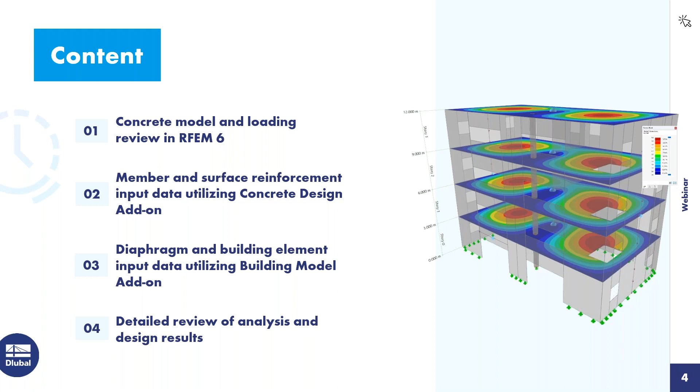Regarding the content over the next hour today, we will be working with the structure you see on the right-hand side. We'll begin in our main program, RFEM 6, where we will review the model as well as the loading. Then we'll move on to utilize the concrete design add-on for our member and surface reinforcement input data. We'll also be taking advantage of the new add-on within RFEM 6 called the building model, which allows us to define building-specific elements such as diaphragms, spandrels, and shear walls. Finally, throughout the presentation, we will be running both the analysis and design and taking a look at the results in more detail. So we'll immediately begin within our main program, RFEM 6 here.

As you can see, I've taken the liberty to already model our concrete structure. But if we visit our base data by right-clicking on the model name, when you begin a new file, you will give it a model name. The type of model will be in a 3D environment, for example, today. Under the second tab are our various add-ons. RFEM is responsible for the full analysis of our structure, but if we wanted to take this a step further, and in particular today, to carry out the concrete design according to the CSA standard, then we would need to activate that concrete design add-on.

Under this third tab, you can see that we will generate the load combinations automatically according to the NBC that is selected here from our dropdown, but many other international standards are also available. We also will be utilizing the 2020 standard. As far as the concrete design, we will be carrying out the design according to the CSA A23.3, the 2019, but if you do have access to the concrete design add-on, you will also be able to run your design according to the ACI, the Eurocode, or other international standards offered.

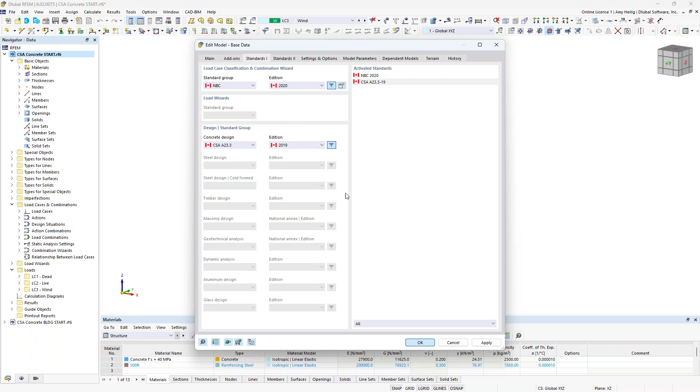Once this information is input, we can go ahead and jump back into the main program RFEM to review the model input data, and we'll begin with our materials. On the left-hand side, you can see that the concrete compressive strength I'll be utilizing for all of our elements today will be 40 MPa. If I double click on this material, I wanted to point out that the material type is set to concrete. When we do this, we have an additional tab to specify the creep and shrinkage properties of the material as well, which will come into play later with the long-term deflection. For our example today, I'm going to leave these options turned off, but keep this in mind for those specific concrete materials. I also have here defined the reinforcing steel material, 500R, which will come into play later with our reinforcement input data for our elements.

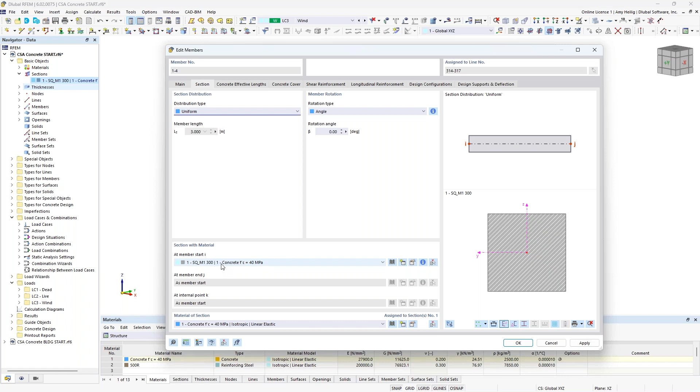In addition to the materials, we also have our cross sections. I actually only have one cross section defined for our members, which are the columns running up through the center of our structure. Double clicking on these particular members, you can see that the member type is set to beam, so this would be any standard beam or column element. What also may be common with concrete design is the member type rib, so we can place a beam element below the depth of the slab here, integrate the internal forces to design this as a T-beam. I won't be utilizing this type of member in today's example, but in the previously recorded webinar for ACI 318 design, I go more into depth with the member type rib as well as the design, so you can refer to it there. For today, I'm just using the standard beam type for our columns. We also have here the cross section and the material assigned to the member. You can see this is just a standard 300 millimeter by 300 millimeter with that same concrete compressive strength assigned as the material.

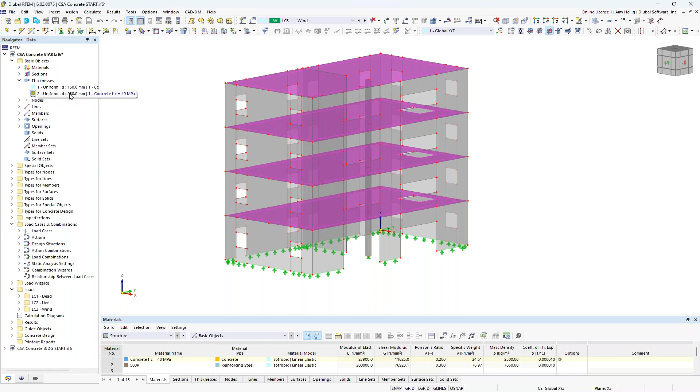As far as our surfaces, we have two different thicknesses assigned to these surface elements. For our walls, they are all utilizing a 150 millimeter thick definition type. And as far as our floor or slab elements, these are going to be slightly thicker at 250 millimeters.

With the modeling of our surfaces, you'll notice that all of these segments for spandrels and shear walls are modeled as individual surface elements. This gives a little bit better output when it comes to the building model add-on we'll visit later today, in contrast to modeling one continuous surface and inputting standard openings as you see up here in our toolbar. We are working in the next several weeks to optimize this so the building model can also just handle standard surfaces with standard openings, but for today, just notice that all of these are individual surface elements modeled around the openings themselves.

Finally, you will see down here at the bottom our supports defined. So just a standard pin type application at the bottom of our 2D surfaces with a line support. This pin support will be applied at every FE mesh element at the base of these walls. We also have a single nodal support here at the base of our column.

Now that we have reviewed the general information for our model, I want to get into the loading. We'll go ahead and access our load cases and combinations dialog box. Under the base data, we have the same information we defined previously, where we're going to generate those load combinations automatically according to the NBC 2020. When this checkbox is checked, we will generate those load combinations automatically. Alternatively, you can uncheck this option to manually generate the load combinations instead.

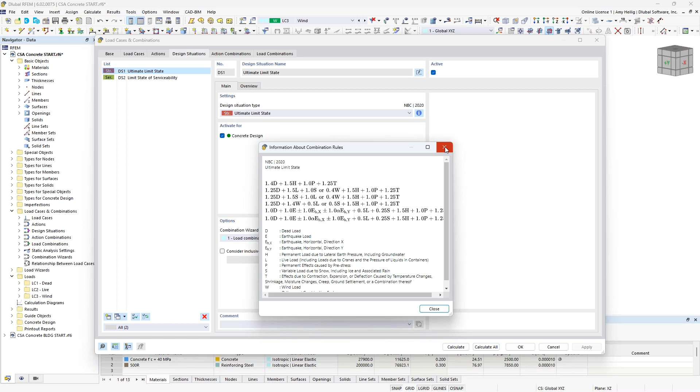Jumping now to the design situations tab, you can see that two design situations are automatically generated based on the NBC, and design situations are always needed when we carry out the design within these additional add-ons. Because we've activated the concrete design, you'll notice the design situations are both listed here for the concrete design and turned on - this will make more sense when we get into that add-on later. A design situation is nothing more than grouping together the factored load combinations according to the NBC standard for this first design situation, and we can review this data directly from the NBC standard with this info button. The unfactored load combinations are part of this second design situation, and again we can reference the code here.

All load combinations will be carried out according to a second order analysis. Finally, we jump to our load combinations tab. You can see the individual load combinations listed out, and our factored load combinations in red belong to that first design situation, while our unfactored load combinations here belong to the second serviceability design situation.

Before we move back to the RFEM model, I want to quickly explain how we can take into consideration the I crack factor requirements from the CSA standard, in particular from clause 10.14.1.2. This is a requirement from the standard that we apply this crack factor to the stiffness of our elements within our concrete model. The problem is that when we draw this model, this is not automatically taken into consideration.

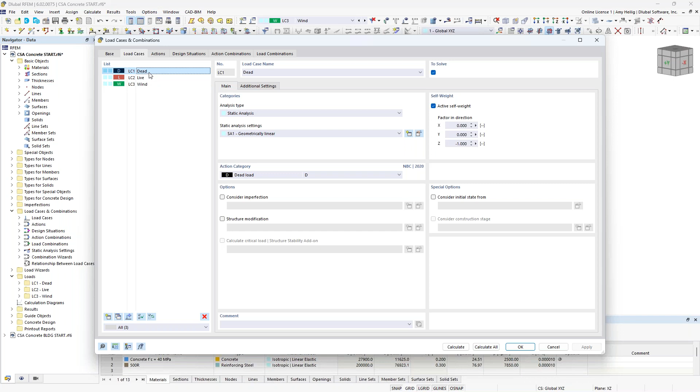So rather, we need to give that definition directly under the load cases and combinations. We'll begin back here under the load cases where we have the structure modification checkbox. What I'm going to do is create a new definition type here for both our members and our surfaces. Now we get two additional tabs up here at the top, and you'll notice under the member modification, I want to create a new definition type here as well.

We have an additional drop-down box where we can directly select the CSA A23.3 standard, referring directly to table 10.14.1.2. We have 2 different component types, columns and beams, but for today's example, we only have columns available in the model, so the I crack factor directly from the CSA standard for bending stiffness will be applied to those members.

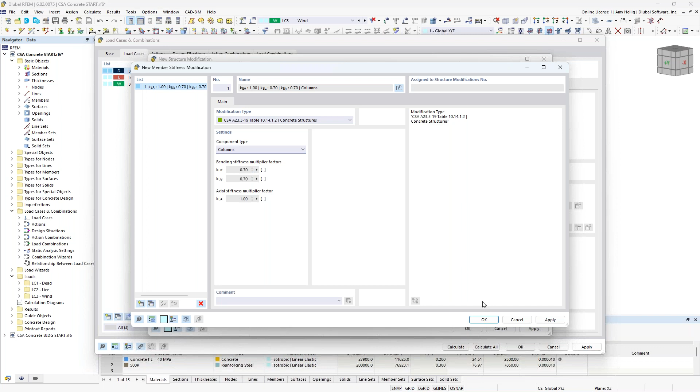Once we create the definition type, I need to graphically select the members here that I would like to apply these to. So I'm just going to choose the 4 column elements here, and you can see the numbers 1 through 4 are now populated within this table.

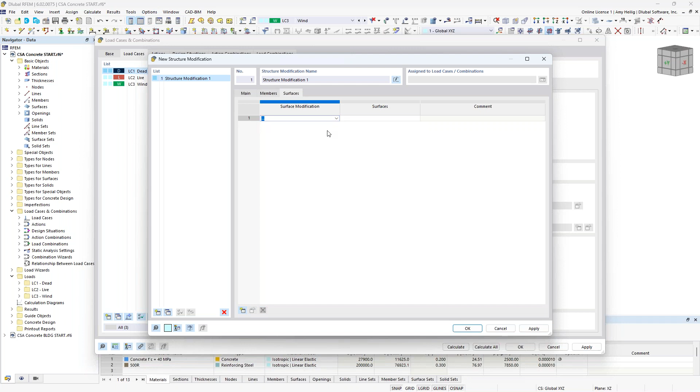We do the exact same thing with our surfaces tab. I use my drop-down box here to create a new stiffness modification and select the CSA standard again. Under the component types we have 3 different options, and we'll begin with walls uncracked, so we have the relevant I crack factor applied to our 2D surfaces for wall elements in bending and torsion. I click OK, and now I need to graphically select the wall elements.

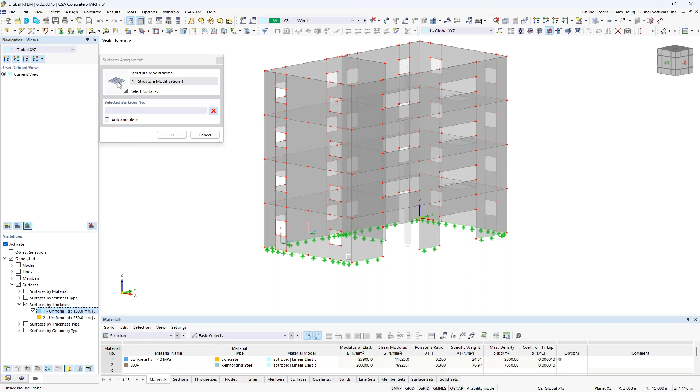I could individually select these or use my selection box graphically, but another easy method is to take advantage of the navigator view options, where we can select various elements. We'll begin with our surfaces, where I can select all surfaces graphically by their thickness. So I can select all surfaces that are 150 millimeters thick, which will essentially be all of my wall elements. I graphically select them, click OK, and now those values are input into this table.

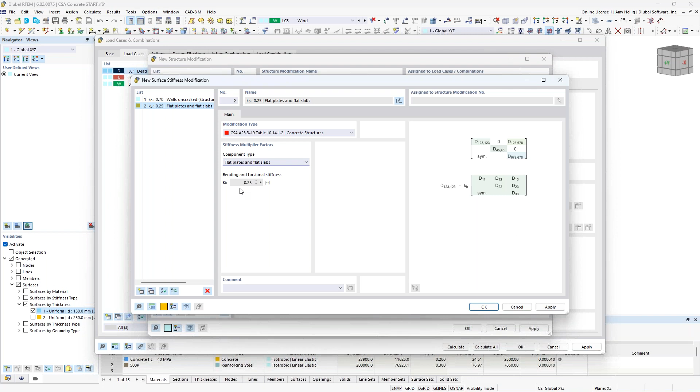Now we lastly need to create one more stiffness modification. We're going to use our drop-down for the CSA standard to select flat plates and flat slabs. The I crack factor is updated from the code to 0.25. I click OK, and now I need to graphically select the members this will be applied to. So I'm going to modify my views to the surfaces that are 250 millimeters thick, which are all of my floor slabs. I select those, click OK, and now this information is complete.

Now that we have this structure modification definition, we want to apply this to the additional load cases here. I can select both with my shift key to simply activate this modification again. But it's not enough to only apply it to the load cases, we also need to apply it to our load combinations.

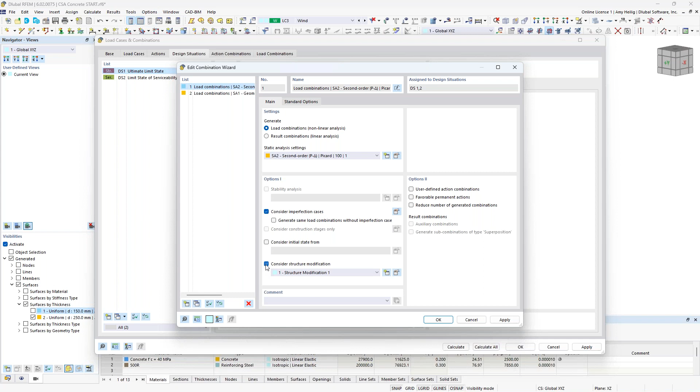The easiest way to do this is to go to the design situations themselves. I had mentioned how we're automatically running a second order analysis with the combination wizard settings down here at the bottom. Well, if we go into the detail settings for this, we also have that exact same checkbox that we can turn on for the design situation, which will in turn affect the load combinations.

But I'd really like to apply this I crack factor only to my factored load combinations for the ultimate limit state. For my serviceability, I don't want to apply the I crack factors. Instead, what we refer to for topics like deflections under serviceability is the effective moment of inertia, called out in clause 9.8.2.3 within the CSA standard. When you do the design within the concrete design add-on, the effective moment of inertia will automatically be calculated.

So I want to turn off the I crack factors for my unfactored load combinations. A very easy way to do this is to make a copy of my existing definition type and simply turn that off with the checkbox option. So now with my factored load combinations, I leave this with my first definition type, but for my unfactored, I'm going to use my drop-down box to select that second definition type.

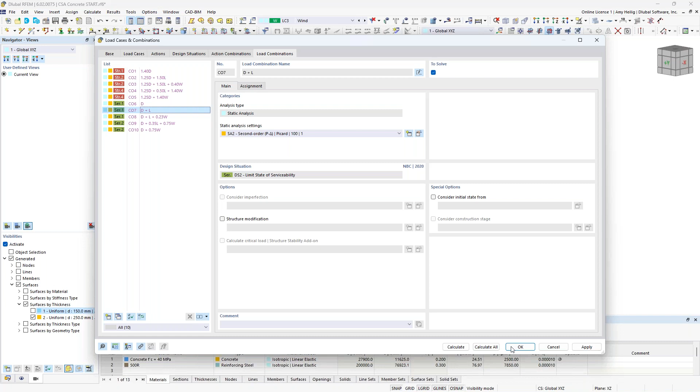If we jump to the load combinations, we now see our factored load combinations here with the structure modification turned on, and our unfactored load combinations will have this option turned off. Okay, so now that we are complete with the load cases and load combinations, having applied the I crack factor requirements from the code, I want to go back to the RFEM model here just to take a look at the display of our loads.

So again, a very simple application for today. For our dead load, you'll notice I just have simple surface loads applied at each floor level of 3 kilonewtons per meter squared. When we look at the live load, exact same concept, and you'll also see here that within RFEM 6, we can right click on these loads and decrease the size of them graphically with this slider tool. But I've essentially applied these live loads at the interior floors only.

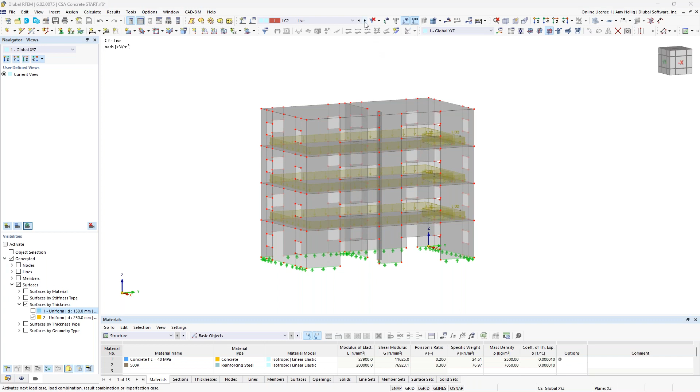And finally, we also have here a wind load. So again, a very basic loading application for today. We have 2 kilonewtons per meter squared in the global X direction, and then 1 kilonewton per meter squared as a suction force on the other side. I recognize realistically we'd probably have additional suction forces on the roof, and we'd probably also want to consider these openings and apply them as line loads around the edges of our door and window openings.

But for today, we're just sticking with this simple application. Now that we have our 3 load cases defined with the loading applied to this structure, we can jump down to any one of these load combinations and cycle through them to see the loads applied on the structure simultaneously, taking into consideration the load factors as well.

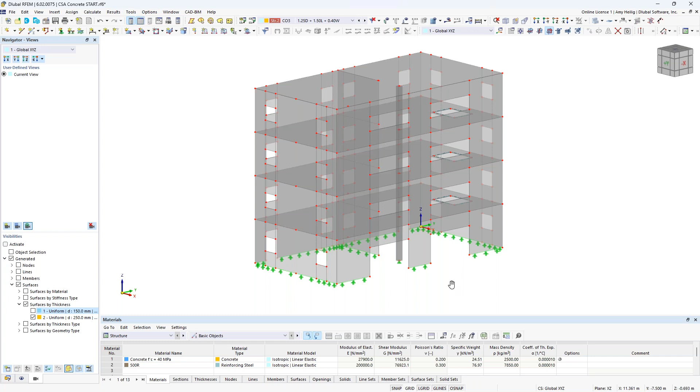All right, so now we have reviewed the loading. We are finally ready to input in the reinforcement for some of our elements specific to the CSA standard. And we will begin here with the reinforcement input of our columns.

I'll go ahead and hold down my control key to create a user-defined visibility for only these members. When I double click on all 4 of members, numbers 1 through 4, you'll notice that we have the design properties turned on here. This is just telling the program that not only do we want to carry out the analysis, but we want to take it a step further to actually design these in the concrete design add-on. We have all the available tabs up here at the top, but notice when I uncheck these, all of these tabs actually disappear, just telling the program I only want to carry out the analysis with the concrete material, no reinforcement input.

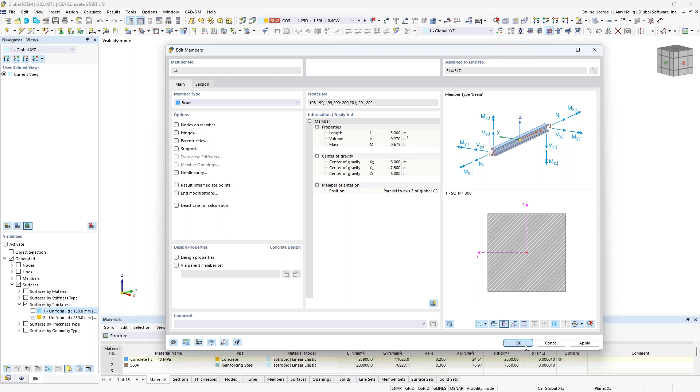So what we, of course, will do is input the reinforcement here, but assuming that we want to have the same reinforcement for all of these columns at all levels, I certainly could go into each individual member and input this reinforcement. But alternatively, we can take advantage of what we call the member representative. I'm going to access that same base data dialog box by right-clicking on the model name and jumping to the settings and options, where I can turn on the member representatives checkbox. This is going to group together members that are really similar or identical in most ways, including materials, cross sections, and the length. Now when I click OK, I get a new option within my navigator called Member Representative, and this will group together these 4 identical members.

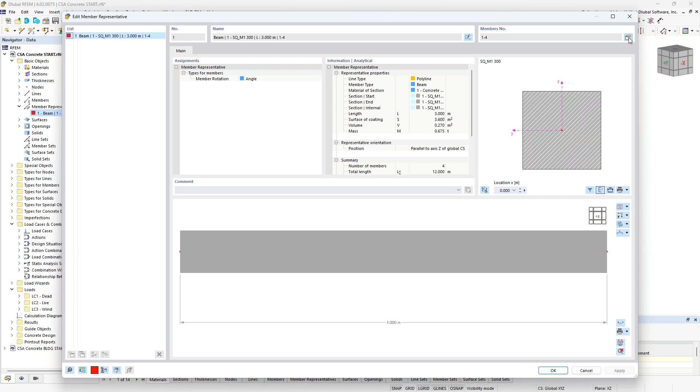Double clicking on the member representative opens up this dialog box, and you can see that it includes members 1 through 4. If I go into the edit members setting up here in the upper right corner, we're back into the same dialog box. I can turn on the design properties for those additional tabs here. But again, instead of individually inputting this reinforcement, I'm going to click OK, and all of these exact same tabs will be available in the member representative. So this way, if I need to make any modifications to this reinforcement, I can do it through the member representative, which will in turn make those same changes to members 1 through 4.

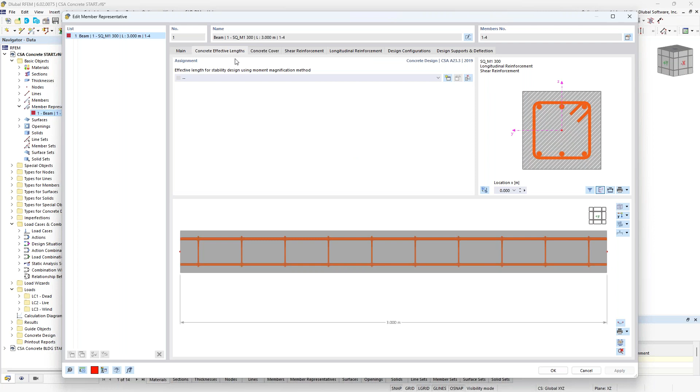So we'll begin by working through these tabs up here at the top. The first one is the concrete effective lengths. This is only if you're going to carry out the moment magnification method, and because we are running a second order analysis, this is not required. Moment magnification is required for first order analysis. So essentially, we don't need to do anything within this particular tab, and we can leave it empty and move on to the next.

We have here the concrete cover. So I'm going to specify 30 millimeters for my concrete cover for these columns.

Under the shear reinforcement, this is where I'm going to specify my stirrups. Under the first dropdown, I choose the stirrup type, and I'm going to go ahead and choose the default first option here. The material is also set, since I already have this reinforcing material defined within the model, so I can just simply select it from my drop-down box. But if we did not have that reinforcing material available to us, we can click on the 3 dots here. This will bring up our material dialog box where we can access our material database. Utilizing the filters over on the left, we can filter to Canada, filter the material type to reinforcing steel, the CSA standard, and then we have these available reinforcement materials from the library directly.

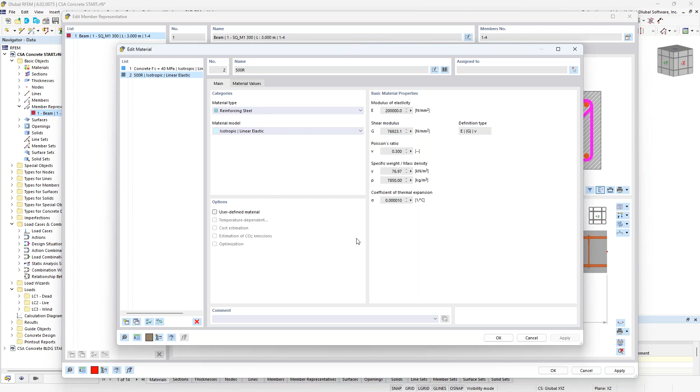If we choose one of these reinforcement materials and we want to make some modifications, we can always choose the user-defined material option checkbox, which allows us to make modifications for a user-defined material. For today, we already have this 500R defined for our reinforcing steel, so we'll go ahead and utilize that.

Now I want to select within this drop-down box the bar diameter, so we'll go ahead and select the number 10s here that are available with this first option. I specify the stirrup spacing such as 0.3 meters, and the number of bars will be set to 10.

Notice that the graphical display down here at the bottom will go ahead and update as I input this information. Now you do not have to set the same uniform spacing and type of rebar across the entire member length. It might be very common for beams, for example, to have more shear reinforcement at the member ends versus the middle. We can simply create new definition types with this button here, and then specify exactly the start and end of the shear reinforcement definition. But for today, for our column, we'll leave this as uniform spacing with those number 10 bars.

Moving on to longitudinal reinforcement. You can see by default the program has set this to symmetrical, which might be more common for a beam. For a column, we want to choose the drop-down option, uniformly surrounding.

Again, that 500R material will be selected here. We have a couple checkboxes to place the longitudinal reinforcement in the corners. This is really more applicable for T-beams. You can see that the reinforcement is already placed in the corners, so nothing to do with both of these checkboxes. We specify the number of bars, 4, and then we will also set the bar size within our dropdown.

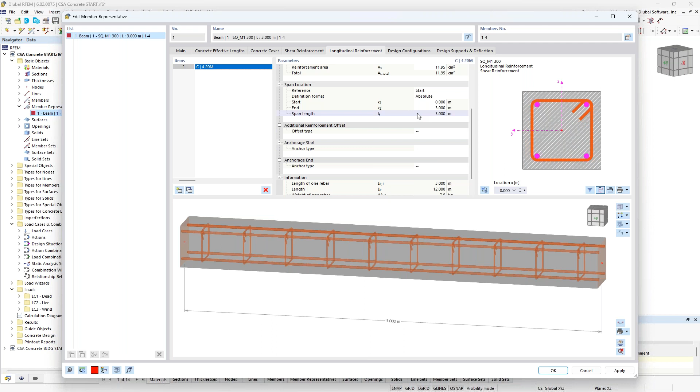So now we have finished the reinforcement input. We jump now to the design configurations tab, and we have here two configurations. The first is the ultimate. So we go ahead and take a look at the default settings here. This is going to be information specific to the ultimate limit state design for our members.

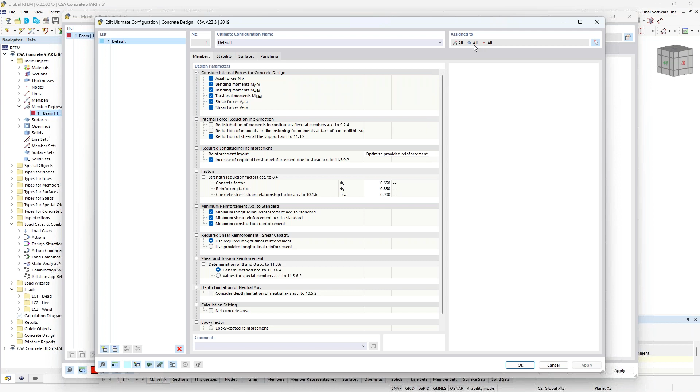You can see here all of the various options that we can turn on or off, change values, or choose a different method, whatever it may be. Also, all of the code references for the most part are listed out here, so you'll easily be able to refer to the code to understand which setting belongs to which requirement. We can also create additional configuration settings for different members. So currently we only have one definition type, but we can create a second definition type and assign it to different members and surfaces and so on.

Same concept for serviceability. If we look at the detail settings here for the default SLS design, we're going to see information specific to serviceability, such as crack control according to clause 10.6.1. We also will check deflections of the members, so you can see here the limiting deflection ratio for members that are supported at both ends versus a cantilever member. We also have here the calculation of time-dependent deflections.

So the default option here is to refer to clause 9825, where we input the duration of the load. What this will simply do is apply a deflection multiplier for the sustained loads to the instantaneous deflection. This is certainly a very simple application here.

Alternatively, if we want to take into consideration creep and shrinkage from those material properties that I mentioned at the beginning of this example, this is going to be a more theoretical and exact approach for creep and shrinkage. For this, we're going to take the approach from ACI 435, as well as the same approach that's followed within the Eurocode, as there really is no specific requirement from the CSA on this topic. For today, we'll just leave this as the simplified time-dependent factor here.

So these are the various settings with the serviceability and ultimate configuration that we'll utilize within that concrete design add-on. Finally, we have here the design supports and deflection. When I don't do anything within this particular tab, the program is going to assume that this member is supported at the member start and the member end at exactly these points shown here. If we have a cantilever, then we certainly want to define a support at either the member start or the member end.

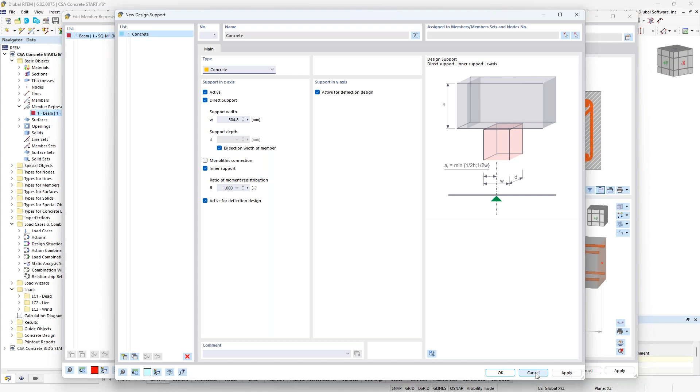But also specific to concrete, even if you do have a beam member that is supported at both ends, it's recommended to create a new design support type. The reason why is you'll see the option for a concrete type support, where we can specify the support width. This refers to CSA clause 1132, which allows us, when talking about shear checks, to take the shear force at distance D away from the support edge. The only way to take that into consideration is to apply these design supports, and then we can factor that shear force into the concrete design add-on. Maybe not so applicable here with our beams, so we'll just leave this as default, where all forces are taken directly at the member ends.

Now that this information is input within our member, what you would typically see is the reinforcement shown here graphically. I'll turn this into wireframe view, and you can see the longitudinal and shear reinforcement shown. Now that we have the reinforcement for our concrete members, let's cancel out this visibility and move on to the reinforcement of our slab.

I will begin with the slab shown here at the first floor, and we go ahead and double click on this element. You'll notice we have the exact same checkbox available for our 2D surface elements. This tells the program not only to carry out the analysis, but also to perform the design within the concrete design add-on.

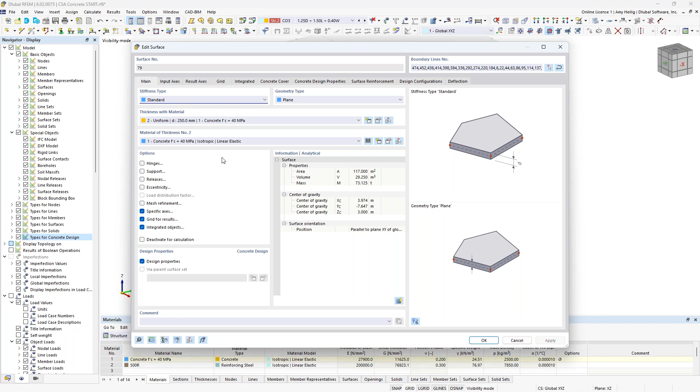So we will move through these tabs. We'll start with the concrete cover, where we're going to increase the cover distance to 40 millimeters at the slab top and bottom. The concrete design properties simply tells the program that when I define my first longitudinal reinforcement, which direction should this be related to in terms of the surface's local axes. The default here is the local x-axis.

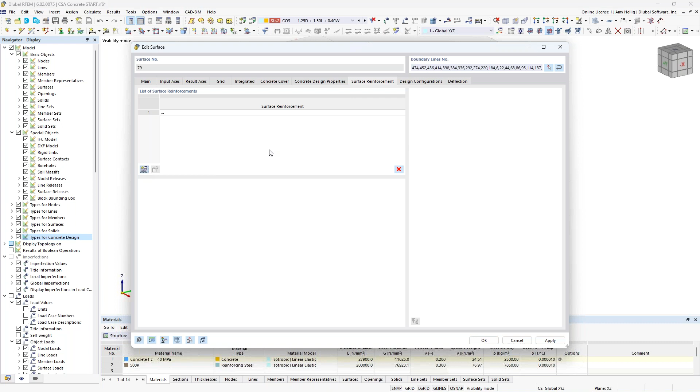So once I get into the surface reinforcement, what we can do is create a new definition type. This dialog box pops up with a first dropdown asking where we want to place this reinforcement on the surface - do we want to apply it to the entire surface or just particular areas? For our first definition, we want to apply this to the entire surface.

The second dropdown is our material, again that 500R we already have defined within the model. The reinforcement type can be welded wire mesh, rebar, or if we're placing shear reinforcement for one-way shear design, stirrups. We will go ahead and utilize the rebar option for today. In my dropdown, I can select number 15 bars, with spacing at 0.15 meters. This is the longitudinal reinforcement now in the local x-axis of my surface.

But I'm likely interested in placing also transverse reinforcement in the local Y direction. We can easily do this by checking the checkbox at the bottom. I select my bar diameter here at 15 mm, and my spacing will also be 0.15 meters. Now we have this longitudinal reinforcement in both directions for both the top and bottom across the entire surface.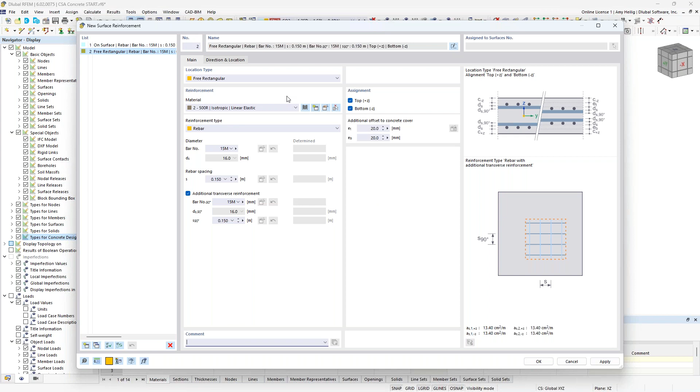Now, if we're also interested in placing reinforcement where locations such as columns are framing into the slab or walls, we can simply create a new definition type. Instead of the location type set to the entire surface, we set this to free rectangular. The reinforcement type might be rebar, and we could select 15 at 0.15. We also want transverse reinforcement, same concept, spacing at 0.15. I could even add an additional offset here from my number 15 bars in this first definition type.

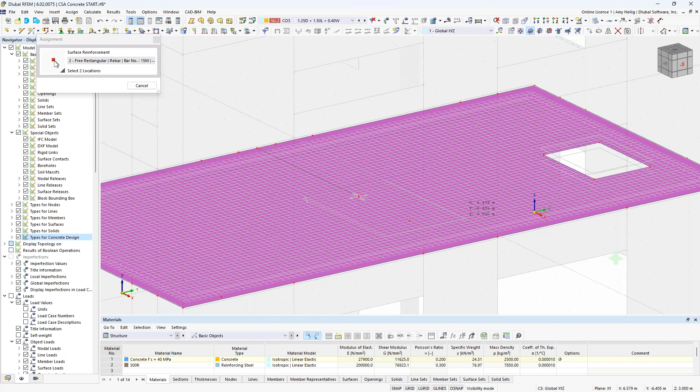Under this second tab, this is where we can graphically place this reinforcement in certain areas of the surface. If I turn on my grid settings to provide a little additional guidance, I can then just click on 2 points - maybe over my column and my wall at the center of the slab where I'd like to apply this additional reinforcement. The coordinate points are automatically populated here, and now we're taking into consideration both of these reinforcement definition types.

What else has been recently released within RFEM 6 is this new auto function.

So if we would prefer the program to optimize the bar size for us based on the required reinforcement from the analysis and design, we can choose the auto function. When we choose this, a dialog box pops up that asks what minimum size and maximum size we want, and then the program will optimize that bar diameter for us.

In addition to the auto function for the bar number, we also have the auto function for the spacing. When we choose the auto function here, we specify the minimum spacing, the maximum spacing, and the increment, and again the program will optimize this based on our required reinforcement. It should be known that you cannot use the auto function for both the bar number and the rebar spacing at the same time, you need to choose one or the other, but it can also be applied to the transverse reinforcement.

Now, for today, I'm going to totally delete this definition type, and we will just utilize this uniform longitudinal reinforcement throughout the entire surface. Also, this surface definition can be applied to more than one surface. So if I want to use the same reinforcement at every single floor level for my floor slabs, I can easily apply this same definition type to multiple surfaces. This way, if I need to make any modifications, I go back in to edit only one definition type, which will then affect all of my surfaces.

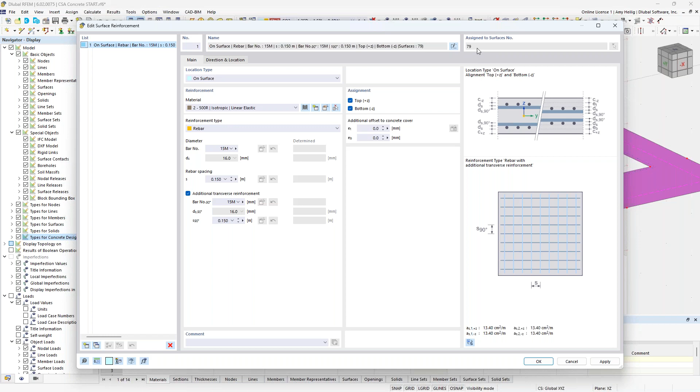So now that we have this specified here, what I'd like to do is go to the design configurations. Very similar concept to what we saw with our members. For the ULS design, instead of the members tab, we go to the surfaces tab, which again has various options for the ULS design specific to our 2D surfaces.

Maybe one important topic is we would want to change whether we are designing a plate or a flat slab versus a wall element, for the maximum longitudinal reinforcement. Again, we can create multiple definition types to assign to our walls versus our floor slabs.

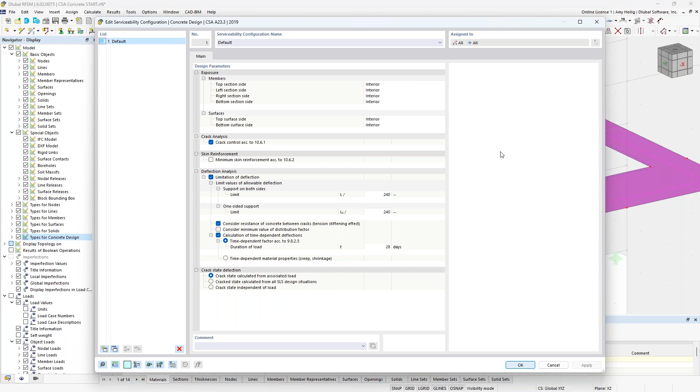So once this information is input, we'll check out the serviceability. This is actually identical to the configurations for our members as well. We're also going to check deflections here for our surfaces. Again, create multiple definition types if you'd like to have different limiting deflection ratios for members versus surfaces.

And finally, the deflection tab. This allows me to specify if this surface is supported at both ends or is it a cantilever. We need to know this information for the limiting deflection ratio.

All right, so now that this input information is complete, what we should see, if I cancel out of my visibility, is the reinforcement shown graphically for our surface as well. So this is going to be that longitudinal reinforcement at both the top and the bottom shown graphically.

If this does seem to get in your way graphically, just go ahead and navigate to the Navigator Display tab, and up at the very top, we can turn off the types for concrete design.

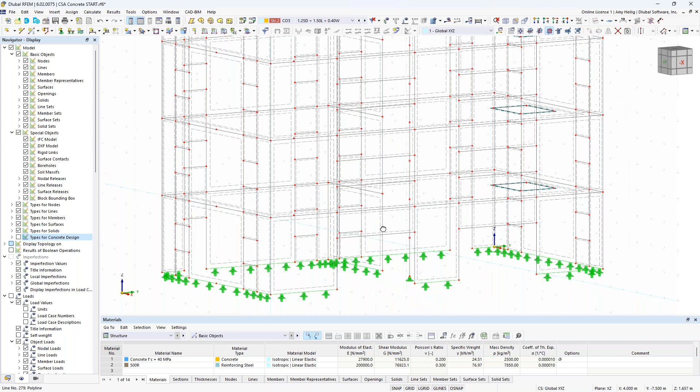So the final topic here is going to be punching shear. This is also a new feature that we have recently released within RFEM 6 for both the ACI and the CSA standard, the ability to check punching shear. When we look at this column framing up into this slab, this is probably an area that we would want to carry out that design at this particular node, but we also can check punching shear at wall ends as well.

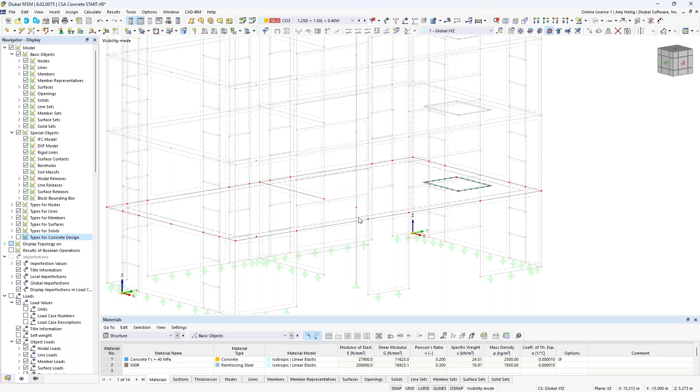So holding down my control key, I'm going to select both of these nodes here and double click on them. We have an additional checkbox down at the bottom to turn on the punching design, again specific to that concrete design add-on. And we now get an additional tab here for the ultimate configurations, only for punching shear.

So we've already visited members and surfaces, but now we have this fourth tab specific to the punching shear design for the CSA standard. Now, it should be known that currently the punching shear is carried out with no reinforcement considered. We do plan to add in the near future the ability to specify additional shear reinforcement for two-way shear design, or punching shear design, but currently all checks are carried out with the unreinforced section.

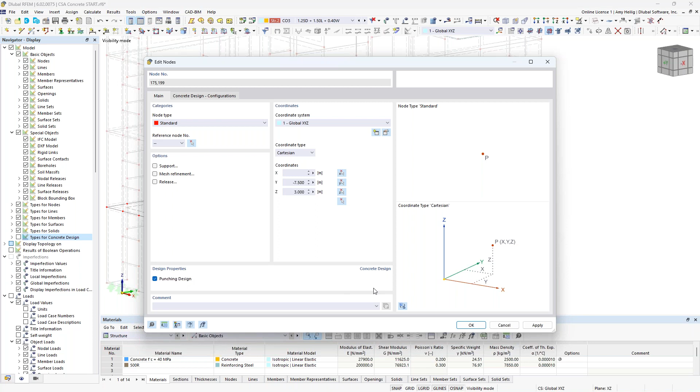So now that we have specified this additional checkbox for these two particular nodes, we are ready to visit the concrete design add-on input data within the table here. So canceling out of this visibility mode, let us choose the concrete design here within our drop-down box. This is only available because I've activated that concrete design back in the base data. Under the design situations here, remember I said design situations are always needed to carry out the design within these add-ons, and here they are listed again.

So we have our ultimate limit state design situation that we want to tell the program to carry out the ultimate limit state type for all of my elements that I plan to design. We also have our serviceability, or unfactored, load combinations here with this second design situation type, and we want to modify this to the serviceability limit state.

Now you'll also notice within this dropdown we have the earthquake limit state, so currently we can carry out the reinforcement detailing requirements for seismic according to the CSA standard. Keep in mind that it is detailing-only checks right now; we continue to move forward with development to do additional seismic checks in the future. If you're interested in the reinforcement detailing for seismic, simply go back to our load cases and combinations, make a copy of our ultimate limit state design situation, and we'd have a third line here where we can now relate that to the earthquake limit state type.

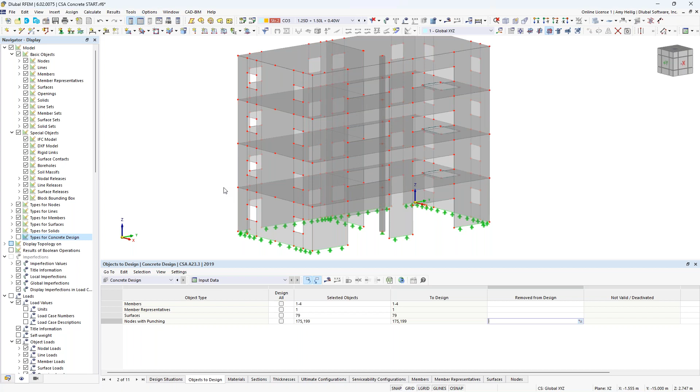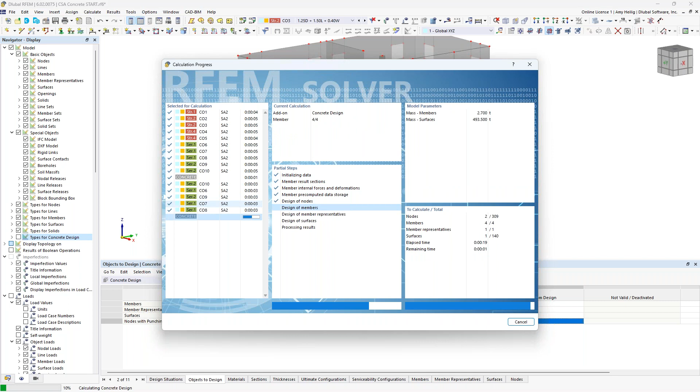So now that we have input all of this information, we're ready to run our calculation, and I do so directly within the table options. You can see the program will now cycle through all of my load combinations for the analysis portion, taking into account topics like the I-crack factor. You'll also see here that we rerun the serviceability load combinations, which relates to the effective moment of inertia that we need to recalculate to determine the deflection checks within the concrete design specifically. And finally, we carry out all of the additional ULS and SLS requirements to give us the design check ratios for all of these elements we have considered.

Now, before I get into the concrete design, let's back up a step just to view the static analysis that's available within our Navigator results option. Nothing to do with design right now, but you can see here that we're currently looking at the global deformations, and I can cycle through these different load combinations to see the deformation of the structure.

But we're also likely interested in topics like the member internal forces. Currently I only have one set of members here for my columns, but we can view the internal forces graphically, such as the axial forces, shear forces, or bending moments. And all of this information is also available in table format. If we go to results by member, we can view that information rather than just graphically, but also in table format.

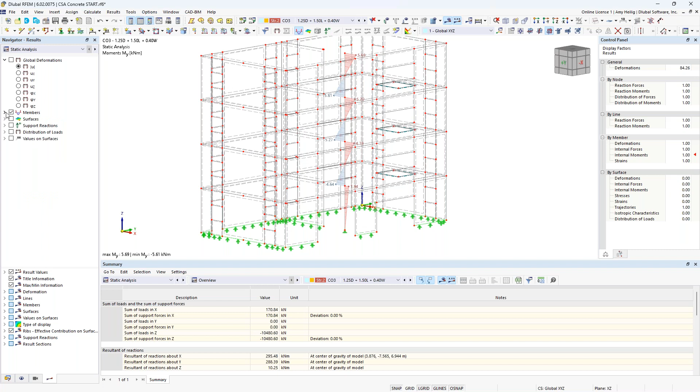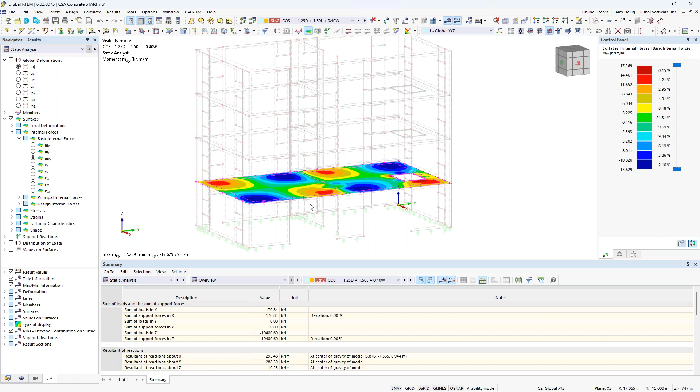It's also important to look at the surfaces. So what I want to do here is create a user-defined visibility for only that particular surface that we're designing, and we activate the surface results, such as the basic internal forces. We have here MX, MY, MXY. All of this internal force information is used in the design of this slab within the concrete design add-on. What I want you to take note of is these membrane forces, or in-plane forces, NX and NY. You'll see here that we clearly have some high values for the in-plane forces of this particular slab. Keep this in mind because this topic will certainly change when we get to the building model add-on and define diaphragms instead.

So now that we have quickly covered the output here from the analysis, we want to take a look at the actual design according to the CSA standard. So under the concrete design here within the table, we're just getting a quick overview of maybe where we have some problem areas.

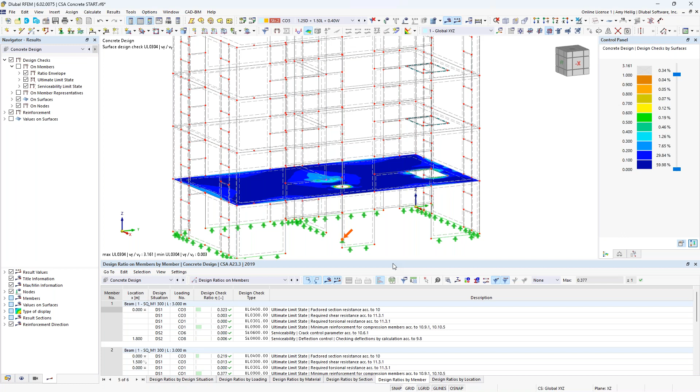Before we address these, which are mainly located on our surface, let us take a look at the design ratios on the members. I can graphically turn on the design ratios of the members here, specific to the concrete design add-on. I'm looking at the design ratios tab for each of the members, and everything is synced up within the table as well as the graphical view, so we can view the design checks for the columns at each floor. We have for each column the ULS checks and SLS checks.

If we want to take a look at the design check details for each one of these particular checks, we can access this within our table. It's called Design Check Details, and this is new within RFEM 6. This allows us to view the equations line by line, along with the variables and code references, so we can show you how the program determined this specific design ratio for this ultimate limit state check.

We can add this information to the printout report. These calculations and formulas will update in real time in the printout report if we make any modifications to the model. Additionally, we can use our drop-down box to switch to a different design check if we'd like to see those formulas listed out. We can expand our table if we're interested in seeing some of the analysis information or variables that go into this design check details.

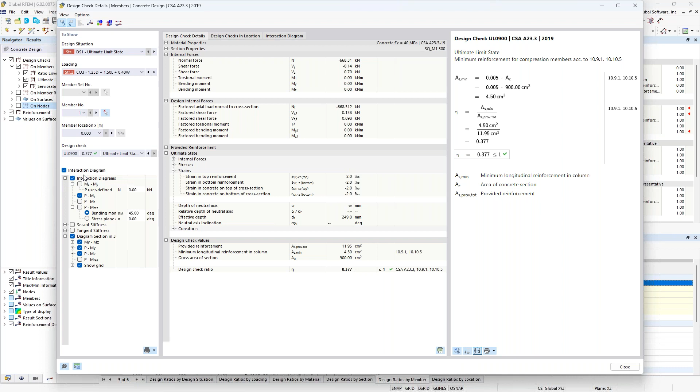Also new within RFEM 6 that we previously did not have in RFEM 5 is the interaction diagram. We can activate this and we get a third tab, where we will see the 3D interaction diagram for our particular column under the applied loading. We can add this as a graphic to our printout report, and we see the values here in table format. We can also see exactly which point we fall under within this moment interaction diagram for this particular scenario. Very powerful in terms of all the detail output information we've added in RFEM 6 for concrete member design.

In addition to the design of the members, we also have the design ratios on the nodes for our punching shear. We'll turn on the graphical display of this, maybe turn off the members, and view in more detail, both in table format and graphically, the punching shear. This is always considering, at least at this point, that the slab is unreinforced for additional shear reinforcement. This allows us to view whether the slab is adequate without that shear reinforcement, or if we need to additionally take that into consideration. Looks like we're a bit overstressed here with the shear design check for punching shear at this particular wall end.

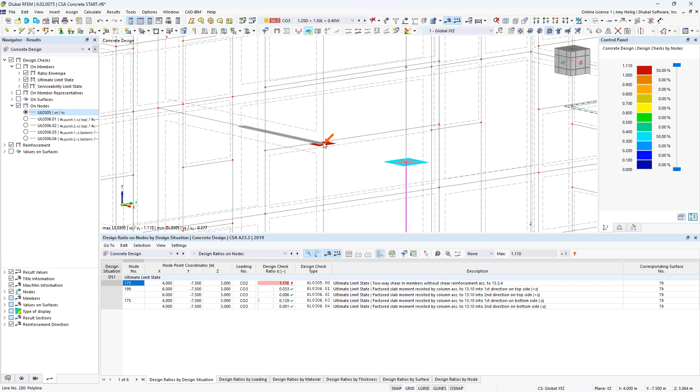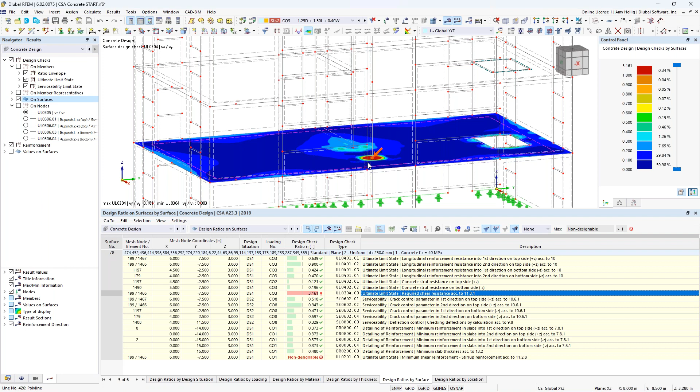Finally, we want to look at the design ratios of the surface. We see this in table format, and I'll turn on the design ratios of the surfaces graphically. A lot of these checks appear okay, but we certainly have some issues, especially with shear checks where the column is framing into the surface. We have a very high design check ratio here, over 3.0.

The slight problem here is that we have this column framing into the beam, and it's framing into this slab at this single FE mesh point, this node shown graphically. In reality, we're going to get better load distribution than what we can show in an FEA program, where all loads are coming in at this single mesh point. This is called a singularity, and this is not unique to RFEM — all FEA programs deal with singularity.

The question is, what tools do we have in the program to deal with singularities, especially with the concrete design, so that we're not over-designing the structure, because in reality we know we're going to get better load distribution. Let us go back to the basic model, and I'll create a user-defined visibility with only this surface.

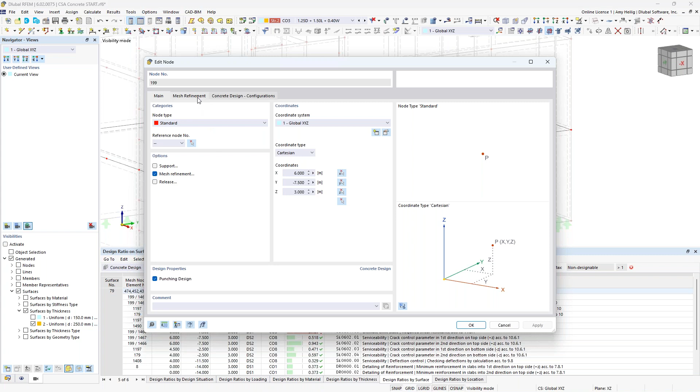To address singularities, the first thing we want to do is double-click on this node and add what we call a mesh refinement. Currently within the global model, we have a mesh setting of 0.5 meters. A nodal mesh refinement allows me to create a new definition type where I can specify, for example, a radius of 1.5 meters, and refine that FE mesh at 0.1 meters at the interior, transitioning to 0.3 meters at the exterior.

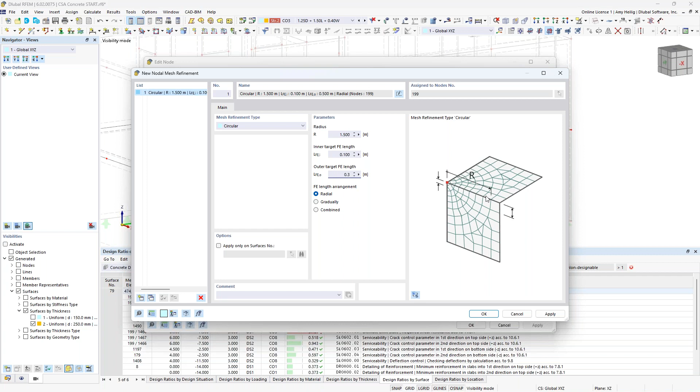So once we have this definition type set, we do need to clear out our results. We click OK, and now we see this additional symbol shown here graphically for that FE mesh refinement.

After we have set the FE mesh refinement, there's also an additional element that we want to add here. This is found under the Navigator Special Objects folder, where we see Surface Result Adjustments. We can right click to create a new definition type, which will allow us to average out the forces over a set area, so that way we can smooth out those high peak forces.

We will specify this one as a rectangular shape with the dimensions set at 0.8 meters by 0.8 meters. I can graphically select this node here right where the column is framing into the slab, and I also want to select the surface that I would like to average out these internal forces: surface number 79. Now, a very common question is, what size do I set this average region or this surface result adjustment to?

This is really up to the engineer's discretion. If you set this to something too large, then maybe we're not accurately capturing high internal forces that will occur. If you set it too small, then maybe we're over designing because we know in reality we're getting better load distribution. So for today's example, just a completely arbitrary value here of 0.8 by 0.8 meters.

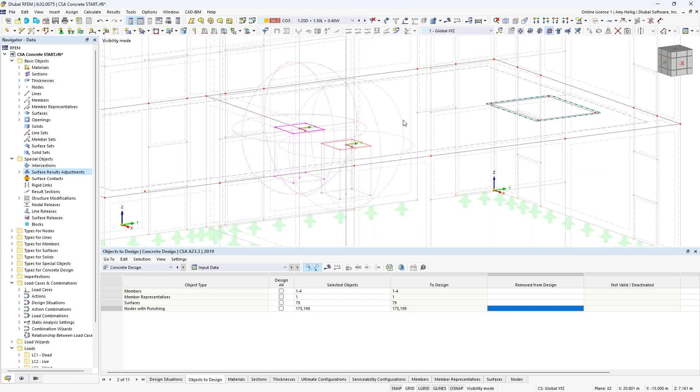So once we have applied the surface result adjustment and the FE mesh refinement, we're going to rerun the calculation here within the concrete design add-on. Because we made modifications to the mesh directly within the RFEM model, we do have to rerun all of the load combinations, because inevitably we're going to get slightly different load distribution when we make modifications to those mesh settings. We'll also cycle back through the serviceability load combinations for that effective moment of inertia and deflections, and finally we'll apply the code equations from the CSA standard.

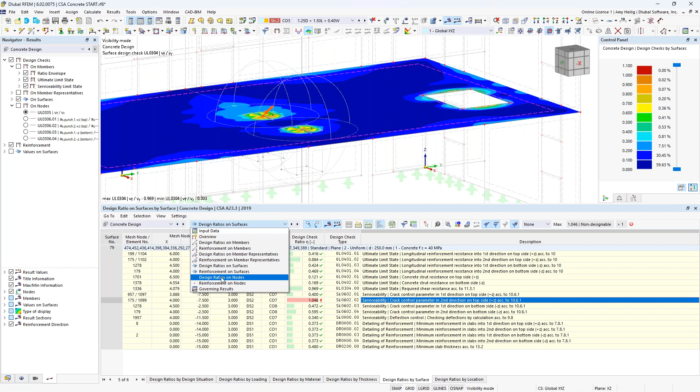Now that we have finished this calculation, let us jump to the design ratios on the surface. I just want to point out that now a lot of these design ratios are either below 1. We have one small issue here that's slightly above 1.0 with the serviceability crack control, but again, we've smoothed out those high peak forces so we get much better results in addressing those singularities. The same concept is also applied here to the design ratios on the nodes - we can see that this value also dropped down as well.

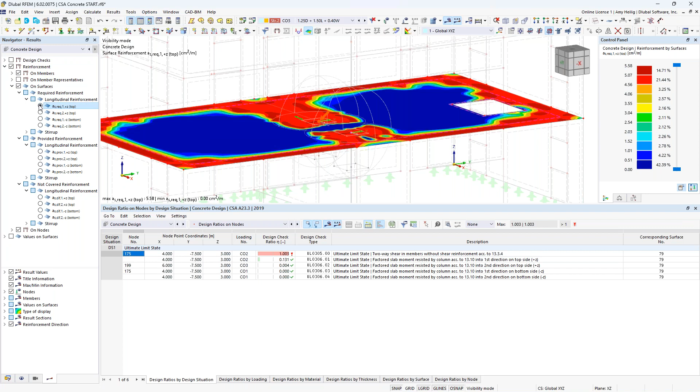The final thing to show you within the graphical view is that currently we've been viewing everything based on the design check ratios, but keep in mind that we also have the reinforcement view here. We can view the required reinforcement based on the analysis in the longitudinal directions for both the top and the bottom. We can also view the provided reinforcement.

So this is my number 15 bars at 0.15 meter spacing. This is uniform, so that's why we're seeing just one solid color here. And then we have the not covered reinforcement - this is just the program simply looking at the required reinforcement, comparing it to the provided reinforcement. If we are not meeting the criteria set forth by the analysis and design, we would see additional areas in the slab where we would want to add more reinforcement, but it looks like it's adequate here.

Okay, so now that we have a general understanding here of the concrete design add-on, I am going to jump to an already saved model where we can touch on the building model. I'm going to revisit the base data. By the way, this structure in the background is the exact same model that we have just been working with - the only change I made here under the add-ons is I have now activated the building model. So what we're trying to do here is that RFEM is a general FEA program, meaning that any structure is possible to analyze and design.

We want to implement more building specific features into this general FEA program for those building specific projects.

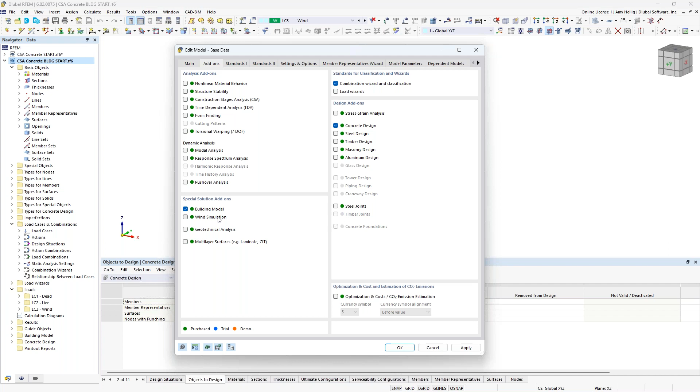So when we activate this add-on and click OK, at first glance it seems like not much is different here with our input data, but we now have an additional folder called building model, where I can right click to create a new building story for my structure.

By default, this first story is created, but I need to modify what's the bottom of the story versus what's the top. I can do so by clicking on these 2 points at the base of the structure, and we can see the height is modified here to 3 meters.

Additionally, we'll see all of the input information specific to this story that we've just defined, based on all of the elements tied to it, including the walls, the floor slab, members, and whatever else it may be.

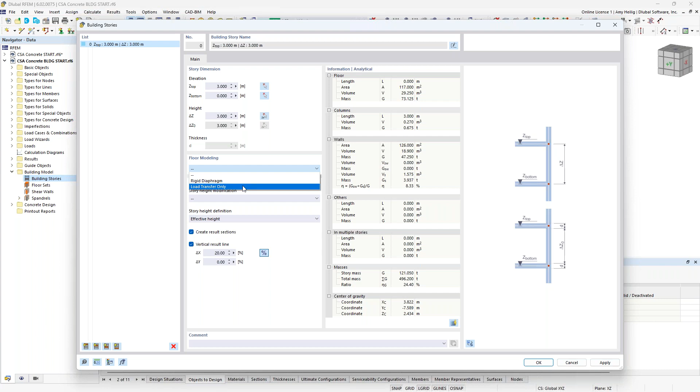We also have the floor modeling drop-down option here to define a diaphragm. If I leave this empty, we'll simply continue utilizing the concrete surfaces already modeled. Alternatively, there's load transfer only, which you can think of as a flexible diaphragm distributing loads based on tributary area of all elements within the story. And finally, we have the rigid diaphragm, which is what we'll use today.

Essentially, we're going to consider each floor slab with an infinitely high stiffness in the in-plane direction, and we actually extract each floor slab to run a separate calculation with the bending moments only. So I want to continue defining these additional stories, and I can do so with this button in the lower left-hand corner.

The program assumes I have the same story height at each level, but of course we can make modifications to that if needed.

When I click OK, what you'll notice now is that each of these stories is shown graphically with the dimensions and labels shown here.

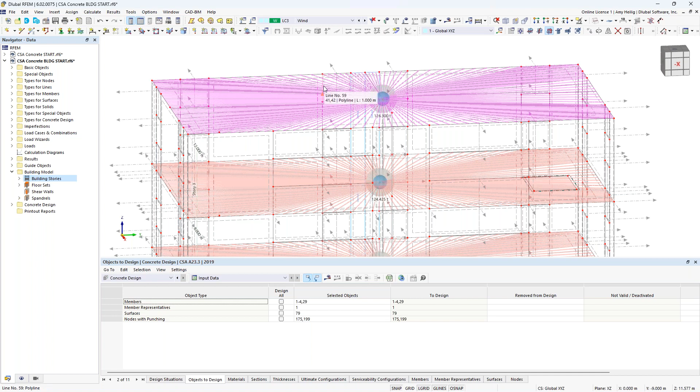You'll also see, if I go into wireframe view, a very different view of each floor slab. We notice all of these red lines, which are just representing graphically that rigid diaphragm. Essentially, we're going to tie together every single FE mesh point at this elevation with that rigid diaphragm constraint condition.

Additionally, if we take a look at that concrete surface we've defined at this level and double click on it, the program has automatically modified the stiffness type to a floor slab rigid diaphragm. Now we can still carry out the design according to the concrete design add-on with the checkboxes shown here. Everything is fully linked there, but you should take notice that the stiffness type is no longer standard, but now of the type rigid diaphragm.

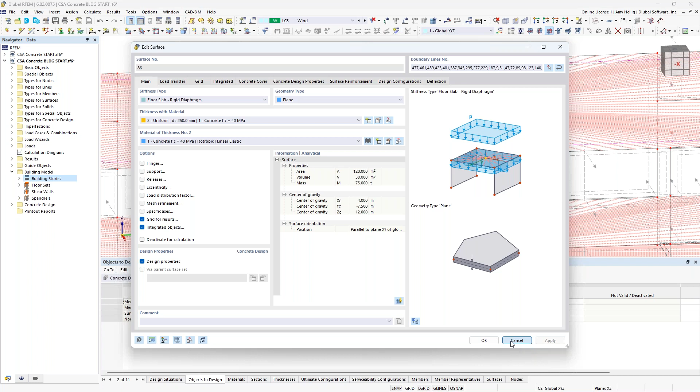If these rigid links seem to get in your way graphically, you can always turn them off with the second tab here in our navigator, where we can turn off the rigid links under the special objects.

Additionally, you'll notice a couple balls shown in the center of these floor elements. The first is the center of mass, but also the smaller one, if we double click, shows us our floor set. The floor set will include all of the connected surfaces, including all of those shear walls and connected members, and will show us information specific to that particular story.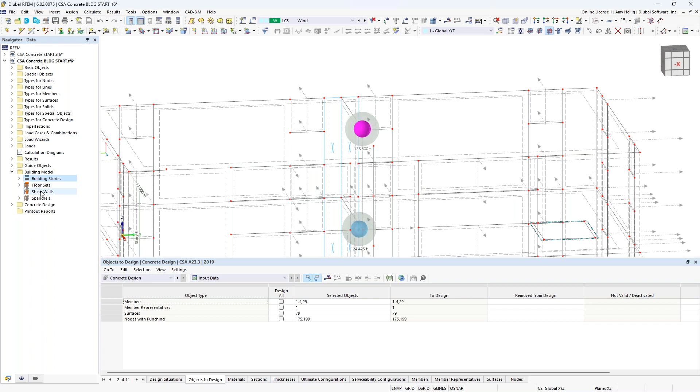So once I have defined the stories, I'm going to go back to the navigator here to define shear walls. I'm going to turn this into a rendered view.

With the shear wall definition, I right click to create a new shear wall type. I will immediately select a set of shear walls, so we'll choose these ones just arbitrarily over on the left-hand side, 4 shear walls in the vertical direction. You can see those surfaces are generated here.

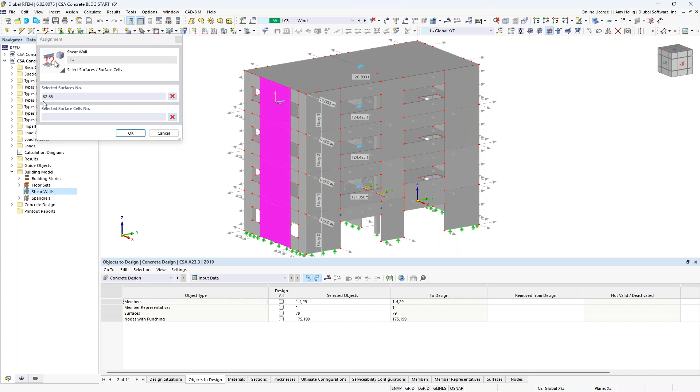What the program will do in my output is create what we call a result beam. It's going to simplify the internal forces for these 2D surfaces and represent them as a member element. This will make more sense once we get into the result output from our building model add-on. Now that I've created this first set of shear walls, notice these are shown here with the cross section, I'm going to create a second set as well.

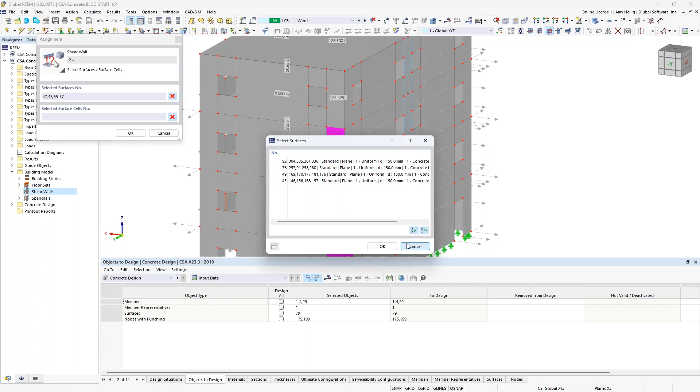The shear wall definition does not necessarily need to be in a single plane. For example, notice that I'm choosing the shear walls at the corner of my structure that have a 90-degree bend in them. I choose all 8 of these segments, click OK, and now you'll see the shear wall is actually represented by these 2 segments at a 90-degree angle.

Now we can take the result beam from this first set of shear walls and design the reinforcement in the concrete design add-on as a typical member. I will show you that shortly with the spandrels. But for the shear walls at a 90-degree angle, it's not quite ready in development for us to also design the reinforcement. We can only consider one single plane right now, but this is still going to be helpful in the analysis output in just a minute.

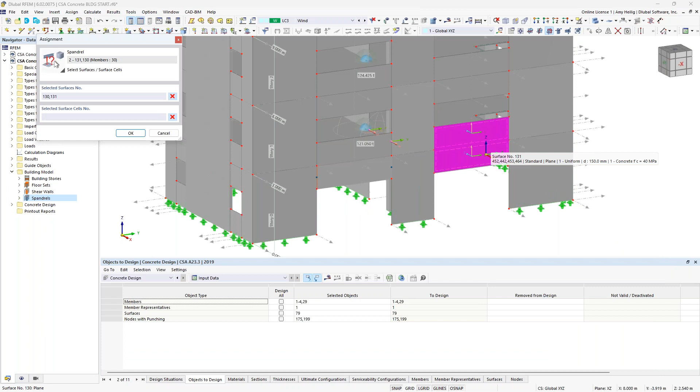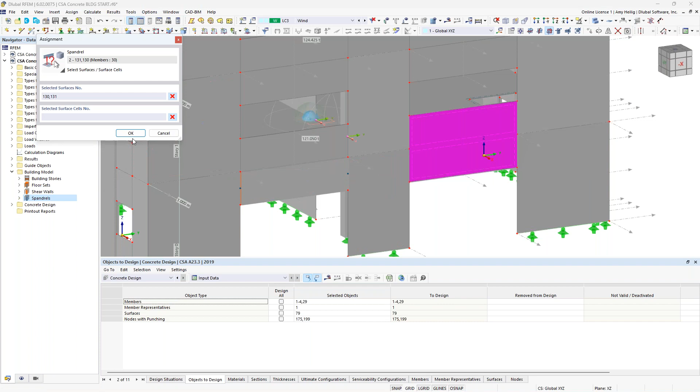Once this information is input for our shear walls, we want to do the exact same thing for our spandrels. I've already taken the liberty here to define a couple of those spandrel definitions. We'll start with the first spandrel at the front of the structure, located above this larger opening. I also created a second spandrel definition by simply selecting these two surfaces here over the larger opening. Notice that I selected two surfaces, so if you have a spandrel that spans over a particular story or floor slab, that's no problem. Similar to the shear walls, we're going to create that result beam to represent this 2D surface as a single 1D member. Just a simple example here for our spandrel definition.

Now that we have this information defined within the model, I'm just going to quickly run one of the load combinations, such as load combination number 4. We'll go ahead and start the calculation for this. Notice that the program will actually create a few calculations because we need to extract out that rigid diaphragm for the separate analysis, separate from the lateral system.

Now that the calculation is complete, let us turn into a wireframe view. The very first thing I want you to notice with the building model add-on is this first option up at the top. We have 3 options now. We can view the main option, which is essentially the deformations for all of our wall elements and member elements, anything that is not a part of that rigid diaphragm. So we can more or less think of this as the lateral system.

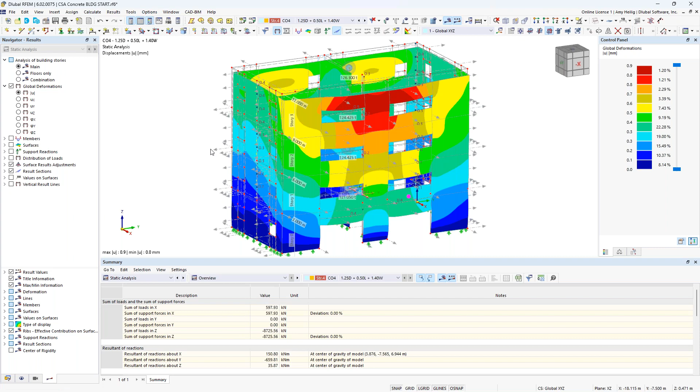We also can toggle here to the floors only, so now we can see the results for only these 2D rigid diaphragm surfaces. And finally, we have the combination here for all elements considered together.

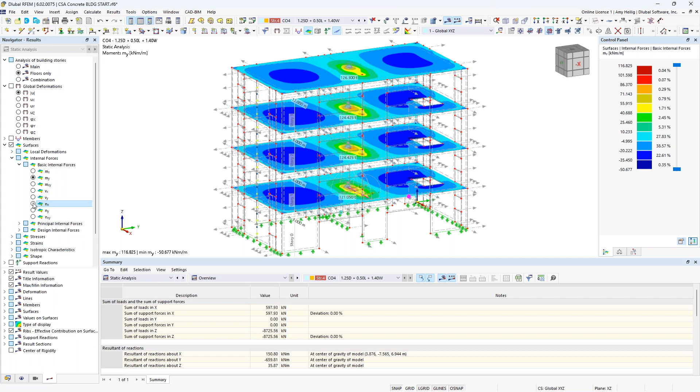Jumping to the floor elements only, not looking at the global deformations, but rather turning on the surface internal forces, we again have MX and MY forces that are going to be used for the concrete design. But a very big difference from what we saw before is if you take a look at NX and NY, these values are now 0. That's because we have that infinite stiffness in the in-plane direction of our surfaces that have been redefined with the rigid diaphragm definition type.

Jumping now to the additional elements other than our floor slabs, I wanted to point out the member internal forces, and I want to show you what we call the result beams. We'll go ahead and activate that here under our members. The members by type only are result beams. Let me go ahead and turn those on here.

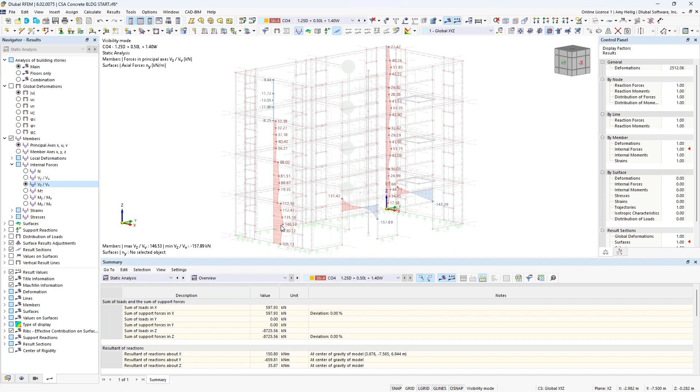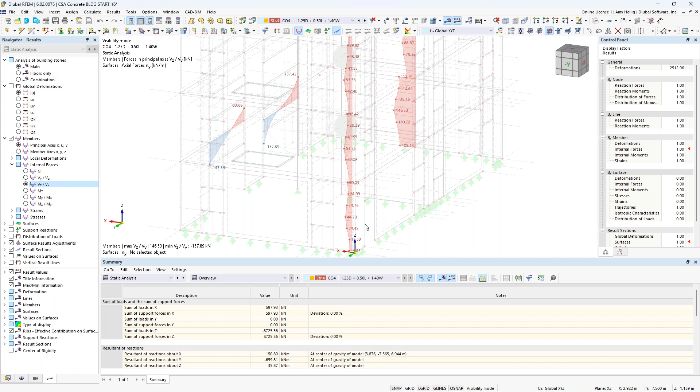So what you will see with the result beam view is, again, the program is summing up the internal forces for these 2D surfaces and representing it as a single 1D member element. Now we can view information such as the shear forces or the bending moments for these shear walls, axial forces, whatever it may be. Remember we had defined those shear walls at the 90-degree angle here at the corner. We still have a result beam that is summing up the internal forces for both of those segments, regardless if they're in the same plane or not.

Same concept here for our spandrels. We're summing up the internal forces for this single surface over on the left, but both surfaces are summed up here, represented by a one-dimensional member. We can view information like bending moments.

So now with this information, we can take these result beams into the concrete design add-on to actually carry out the design of, let's say, this spandrel as a single 1D member. If we cancel out the visibility mode here, and turn this into wireframe view, I'll create only a visibility of this single spandrel.

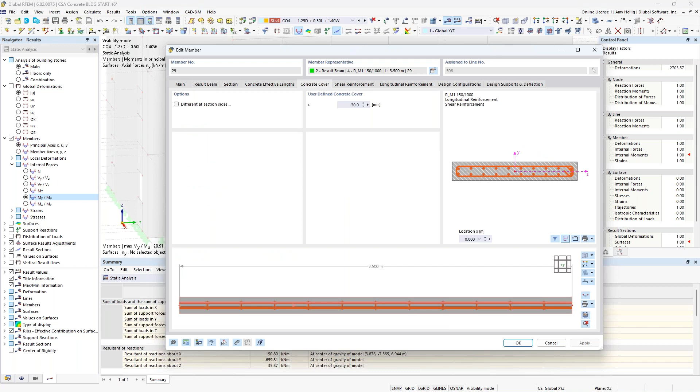I double click here and we can see that this is now represented as a result beam, more or less overlaid on top of that 2D surface. But we have all of the design properties shown to us here where we can specify for this spandrel, the cover is given. The shear reinforcement can also be defined.

One thing to point out here that may be applicable for topics like shear walls and possibly even spandrels is that in the next week or two, we will release the ability to define cross ties that will be taken into consideration with the shear reinforcement as well as the design. More or less those cross ties can be applied to the longitudinal reinforcement, so keep an eye out for that within the next week or two.

Longitudinal reinforcement can also be defined. So you can see here that I specified 4 bars in the corners, but I also utilized the rebar type line here to specify 8 additional bars at the top, and we also have 8 additional bars at the bottom. More or less designing this spandrel now as a deep beam.

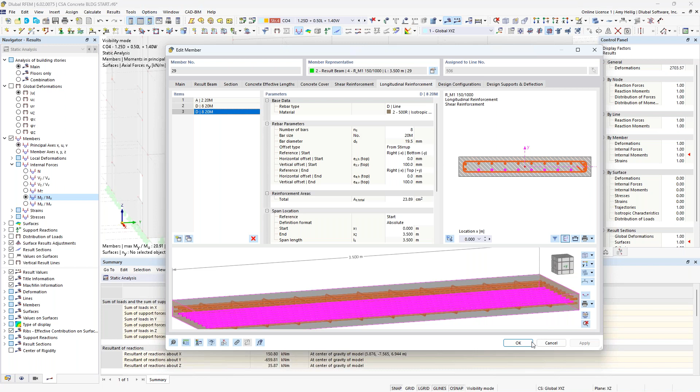And finally, under the concrete design add-on, what we would want to do here is now that we have input in the reinforcement for this result beam, we will also select it here under the objects to design.

Just to quickly show you exactly what the calculation looks like in the last couple minutes here, we'll go ahead and cycle through these load combinations. Notice that it will take just a minute or so longer simply because we have those rigid diaphragm definition types that we need to extract out and do the separate calculation for those 2D elements.

Again, running back through the serviceability calculations here for that effective moment of inertia for all of the relevant objects that we have designed, and finally applying the CSA load combinations with the output as we see here with the progress bar. So once this information is complete, everything that we have seen up until this point is the same.

The only thing that I wanted to point out here is that we want to jump to the design ratios on the members, and we see that this member here is designed as we would any other particular member within the model. So we can view the design check details for this result beam here. But overall, just treating this spandrel like a deep beam or a simplified beam to carry out the reinforcement design according to the CSA standard.

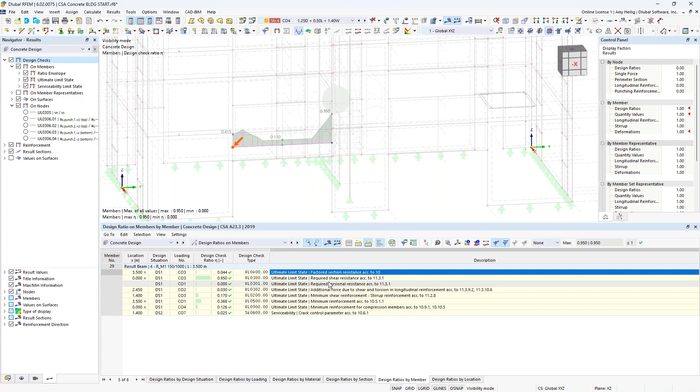Okay, so we will jump back to the PowerPoint here to wrap up today's webinar. I know this is quite a bit of information.